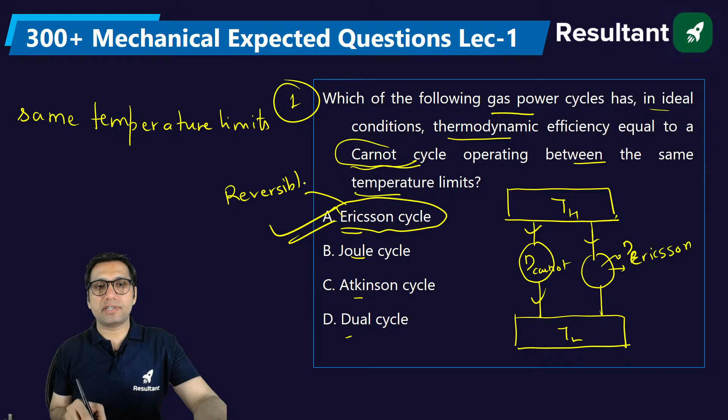Clear? Next: the power developed by the engine at ground level, where air density is 1 kg per meter cube, is 10 kilowatt. So basically, we have an engine which at ground level, when operating, produces a power of 10 kilowatt. At the ground level, when that engine is operating, the density of the air at that point is 1 kg per meter cube. Now the question asks, what will be the power developed in kilowatt at an altitude of 100 meter?

100 meter means if the same engine, that automobile, is moving at some altitude, at an altitude of 100 meter, what will be the power developed? At the ground level, the power is equal to 10 kilowatt and density is equal to 1 kg per meter cube. Obviously, when the automobile operates 100 meter above the ground, at that point density will reduce. How much?

Just half, 0.5 kg per meter cube. One thing you should know: density is directly proportional to pressure. For air, density is directly proportional to pressure, and density is equal to mass per unit volume.

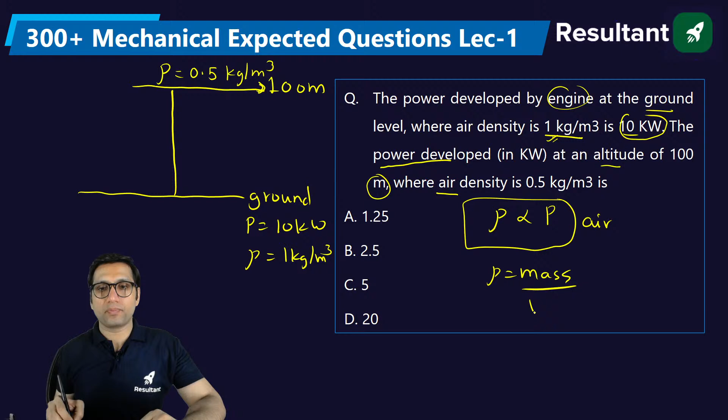In case of the engine, the volume of the engine is kept same. The same engine, when operating 100 meter above the ground, density has reduced because pressure has reduced. Pressure will reduce if you go in the upward direction. So if pressure reduces, density reduces, and it is just half. You can see density was 1, here it is 0.5. Density will reduce, mass of the charge will reduce, power will reduce. So power and density have a direct relation. If the density is reduced to half, the power will reduce to half. Very simple concept. Clear? Understood everyone?

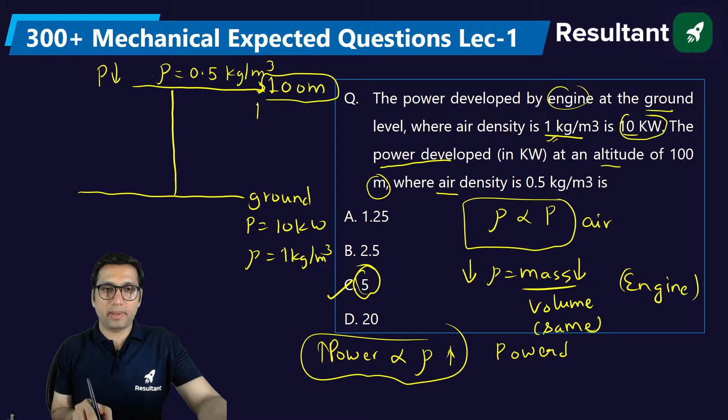So understood, the answer will be 5, because power and density are directly related. More is the density, more will be the power. Density is half, so power will be half. So here the power will be how much? 5 kilowatt. Clear? Next question.

Consider the following statement regarding dry sump lubrication system: the oil from the sump is pumped to the engine cylinder through oil cooler. Dry sump lubrication system is a type of lubrication system used for the IC engine. In this question, they say that in the dry sump lubrication system, the oil from the sump - sump is a reservoir made in the crankcase - is pumped to the engine cylinder through the oil cooler.

With the help of oil cooler, they are saying the oil will be pumped. Why would it be pumped through oil cooler? No, it is wrong.

Oil pressure varies from 30 to 60 bar - no, this is also wrong, this is too much pressure, it's not that much. This is also wrong, it is used for high capacity engine. This is correct - only option 3 is correct, that dry sump lubrication system is used for high capacity engine.

The oil is not pumped to the cylinder with the help of an oil cooler, it is pumped by an oil pump, obviously. Why would an oil cooler be used for pumping oil? So statement 1 is incorrect. The pressure is also not 30 to 60 - that's too much. The pressure will be around 10 to 15 bar, around 10 bar, not 30 to 60. That's too much pressure, so that is also incorrect.

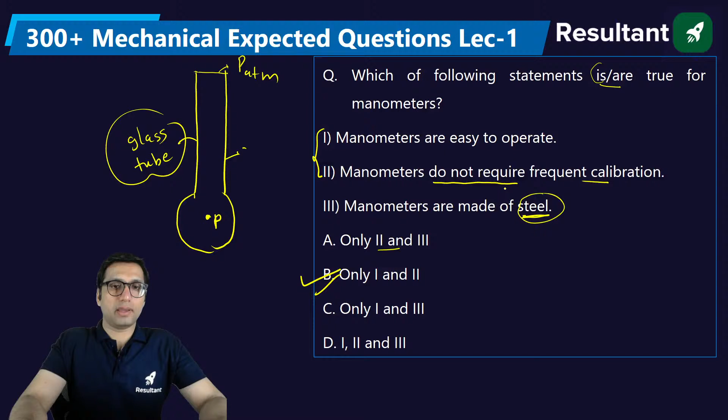Absolutely incorrect. The expression F equals mu A du by dy denotes this is an equation of which of the following Newton's laws? All are Newton's law - Newton's law of force, Newton's law of momentum, Newton's law of motion, Newton's law of viscosity.

Do you know what Newton's law of viscosity is? It says that shear stress is equal to mu du by dy - this is called Newton's law of viscosity. Shear stress, which is shear force per unit area, equals mu du by dy. So from here you can calculate the shear force, which is equal to mu into A du by dy. That is obviously called Newton's law of viscosity. The answer will be option D.

Next question: which of the following is a property of the fluid which makes it suitable to be used in the manometer? We know that the fluid used in the manometer is called manometric fluid, but this fluid should be having a particular property - it's not that any kind of fluid can be used in the manometer. So there should be some property or characteristic that manometric fluid should have.

High surface density, high viscosity, high coefficient of thermal expansion, low viscosity. You have to tell the answer with respect to the manometer. What is the purpose of manometric fluid? Because of the pressure difference, the liquid will rise in the manometer, right? So high surface density - no. High viscosity - if the viscosity is high, that fluid cannot easily flow, so having high viscosity is obviously not correct.

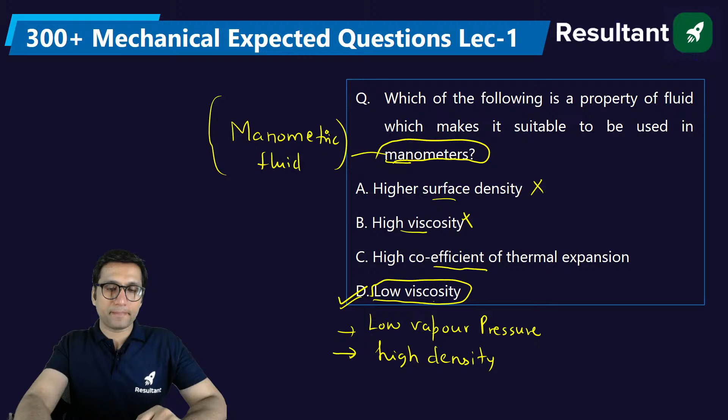In a boundary layer at a certain location, the boundary layer thickness is 0.5 centimeter, displacement thickness is 0.15, and momentum thickness is 0.0585. What is the shape factor at this location?

Now, what is the formula for shape factor? What is meant by shape factor? In context of the boundary layer, the shape factor is equal to the ratio of - can you tell me what is shape factor?

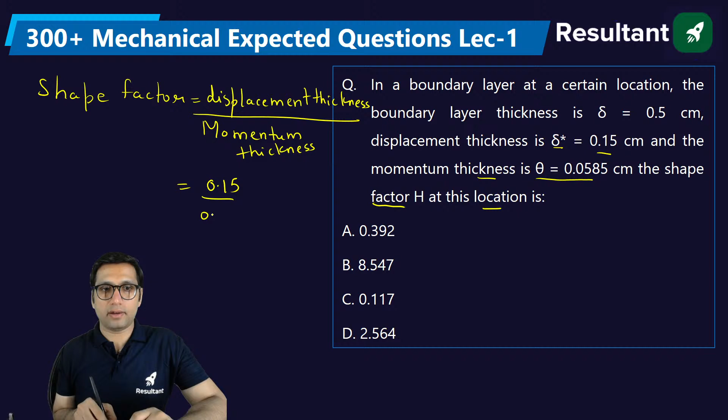Any idea? It is ratio of displacement thickness to the momentum thickness. This is known as shape factor. If you just put the values, you will get the answer. The displacement thickness is 0.15, and this is 0.0585. Put the values and tell me what value you are getting. If you don't know the formula, you will get the wrong answer. 2.564 will be the answer for this question.

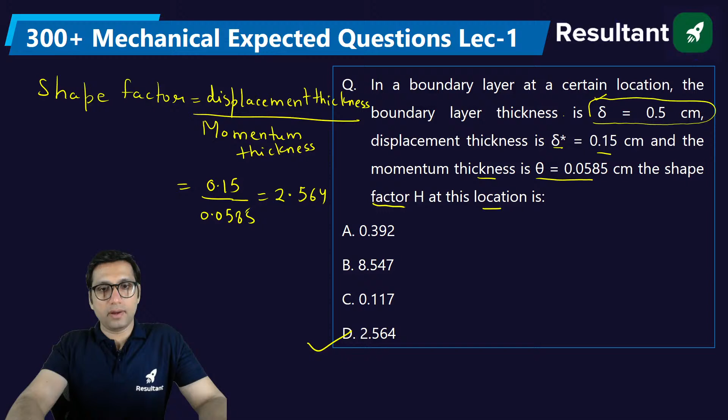So that is the case about the numerical questions. If somehow you don't know the formula, even if the calculation is very simple, you will definitely get the wrong answer. For example, many of you, if you do momentum by displacement thickness, your answer will be wrong. If you do boundary layer thickness by displacement thickness, your answer will be wrong. So you should know the correct formula. Here boundary layer thickness is just given to confuse you. If you are using this value, you will just get confused. It is just given as an extra value to confuse you. It has no role in calculating the shape factor.

Consider the following system: an electrical heater, a gas turbine, a reciprocating compressor. The steady flow energy equation can be applied to which of the above systems? These are all different types of systems, right? The steady flow energy equation is: m into h1 plus v1 square by 2000 plus g into z1 by 1000 plus q equals m h2 plus v2 square by 2000 plus g into z2 by 1000 plus w. This equation, my friend, is the steady flow energy equation. It is only applicable for an open system, not for a closed system, under steady state condition. A gas turbine is an open system.

An electrical heater is a closed system. Obviously current is passed through the heater, but is there any mass transfer in the heater? No. A reciprocating compressor is an open system. So 2 and 3 are cases of open systems. The answer will be option D. It is only applicable for an open system. If there is an electrical heater, no mass transfer takes place in it. Is there any mass transfer? No. If there is no mass transfer, it is a closed system. And if it is a closed system, you cannot apply the steady flow energy equation to it. It is only for an open system, right?

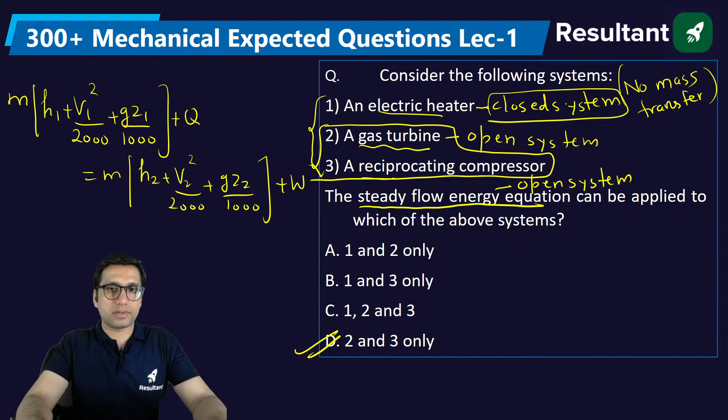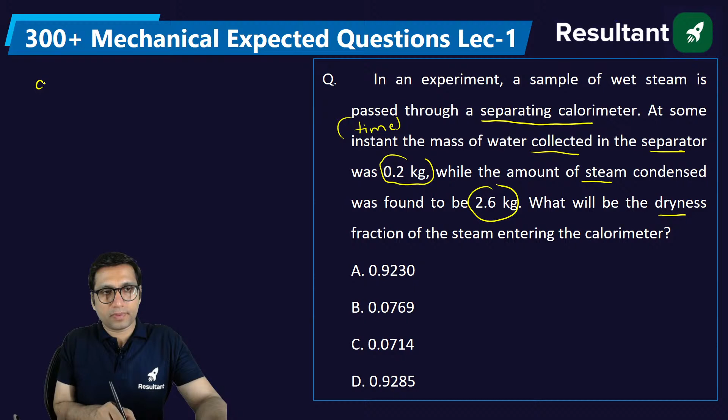In an experiment, a sample of wet steam is passed through a separating calorimeter. At some instant of time, the mass of water collected in the separator was 0.2 kg, while the amount of steam which was condensed was 2.6 kg. What will be the dryness fraction of steam? So what is dryness fraction? The dryness fraction is the mass of the steam which is about to condense, divided by that mass plus the mass of the water which is separated after condensing. So just put all the values: 2.6 by 2.6 plus 0.2, and you will get the correct answer. What answer are you getting? Tell me, everyone.

Formula is important. If you solve it, you will get 0.928. Option D, clear?

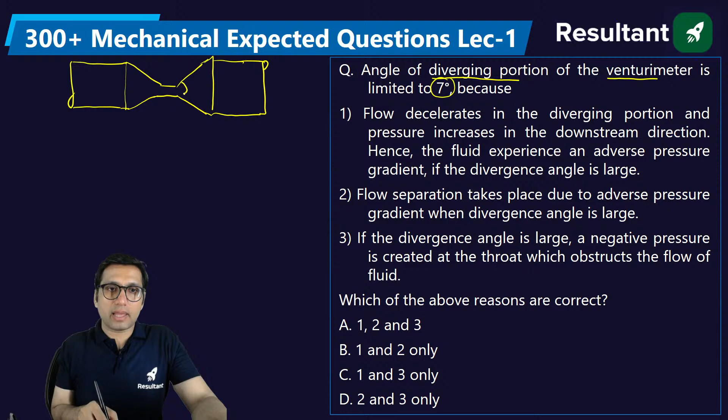Angle of diverging portion of the venturimeter is limited to 7 degrees. You know that in the venturimeter we have 2 sections: one is called the convergent section, like in the case of a convergent-divergent nozzle, followed by a divergent section. So that is how a venturimeter is - it consists of a convergence section followed by a divergent section. But the angle of divergence should be up to 7 degrees, not more than 7 degrees.

Why? Because the flow decelerates in the diverging section. Decelerate means the velocity reduces. Velocity reduces in the diverging portion and pressure increases. Hence, the fluid experiences an adverse pressure gradient if the divergence angle is more.

Yes, that is absolutely correct. And this adverse pressure gradient causes boundary layer separation. So this reason is correct. Boundary layer separation will take place if the angle is more than 7 degrees. Flow separation takes place due to adverse pressure gradient when divergence angle is large. This is also correct. If the divergence angle is large, or negative pressure - no, option 3 is not correct.

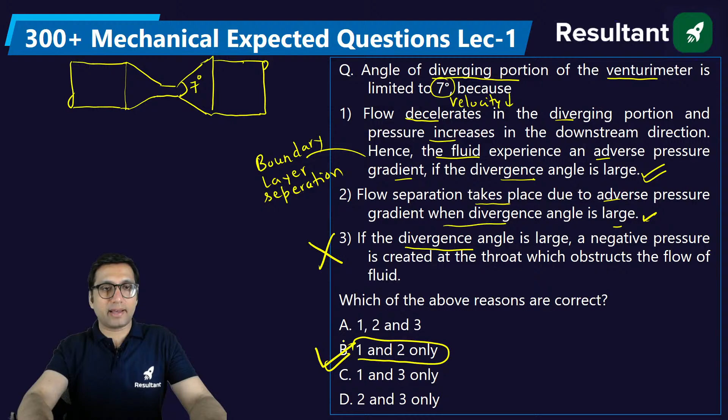The right answer is option B: 1 and 2 are correct. That is the reason why the angle of divergence should not be more than 7 degrees. It should be up to 7 degrees.

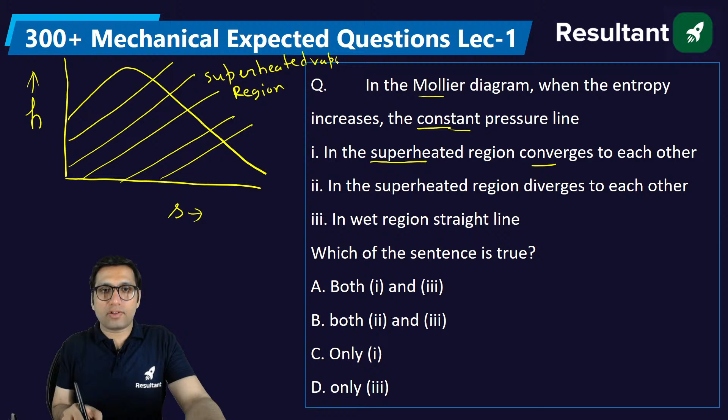Do you see they are getting converged or they are getting diverged? Superheated region, this is superheated vapor region. Are they getting converged or diverged? Tell me - in the superheated region they are diverging, yes, they get diverged.

This is correct. In the wet region, they are a straight line - straight inclined line, not completely straight. You can call it a straight inclined line. Straight line you cannot say, because straight line can be vertical also, horizontal also. It is actually a straight inclined line.

So option both 2 and 3 are correct - 2 and 3, that is option B, will be the right answer for this question. So this is the wet region. In the wet region, the constant pressure lines are straight inclined lines. But in the superheated region, they are diverging to each other. Diverging means positive slope.

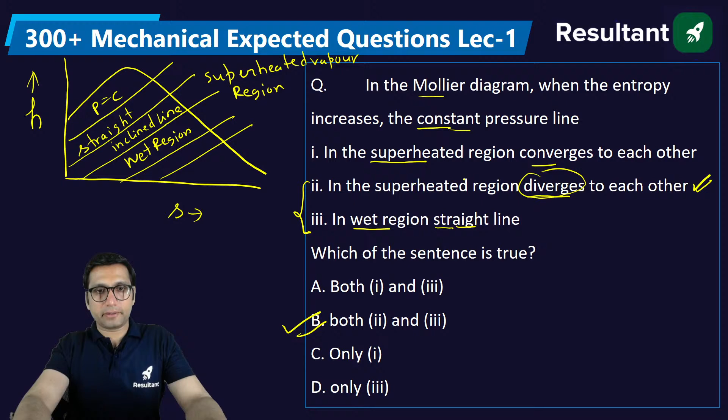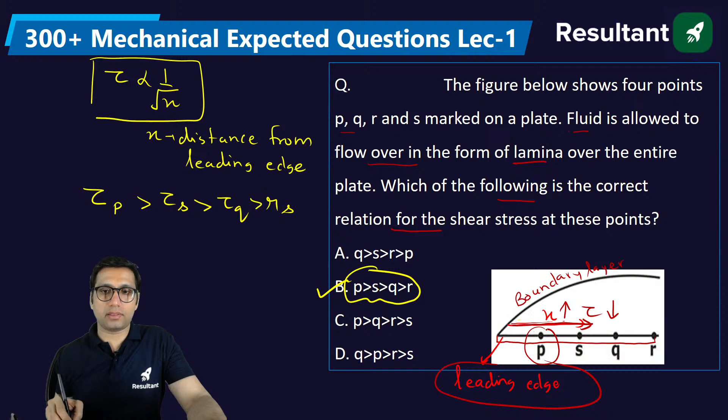As you move in the x direction, this is the leading edge. If you move in this direction, the distance increases, so shear stress will reduce. Maximum shear stress will be at this point, and as you move further in this direction, shear stress will decrease.

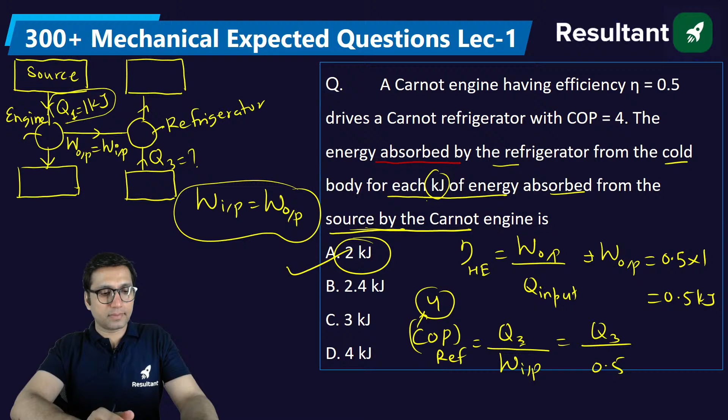Next question: the enthalpy of the wet steam after throttling from 1 to 2. You have to tell the enthalpy of the wet steam after throttling from 1 to 2. The process and properties are given: enthalpy at point A is given, at point B the enthalpy is given, and X1, the dryness fraction at point 1, is given.

So notice here, as you know, point 1 is in the wet region. And for steam in the wet region, how do you find the enthalpy? The formula is HF plus X times of Hg minus HF. Remember this formula? Now HF is nothing but HA here.

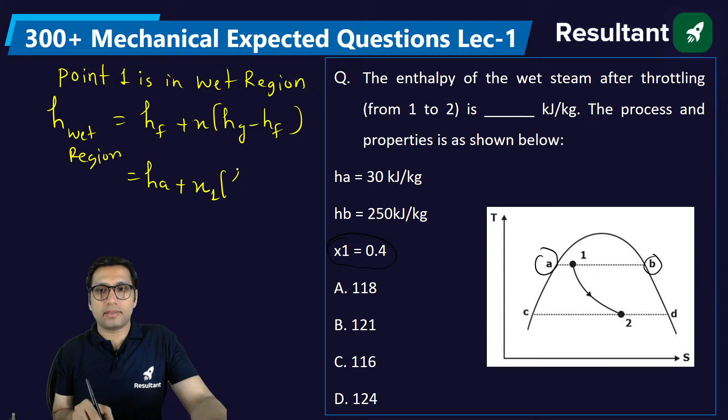HF is HA, X is already given as X1, and Hg is Hb minus HA. Just put all the values, you will get the answer for enthalpy of the wet steam after throttling. But in this question they are asking H2, after throttling they are asking H2. But you know that for throttling, H1 is equal to H2.

For throttling, enthalpy is constant. So if you find the value of H1, you can get the value of H2 - that will be the same. So it will be 30 plus 0.4 into 250 minus 30. Solve it, you will get the answer. Tell me what value you are getting. Understood the concept or not?

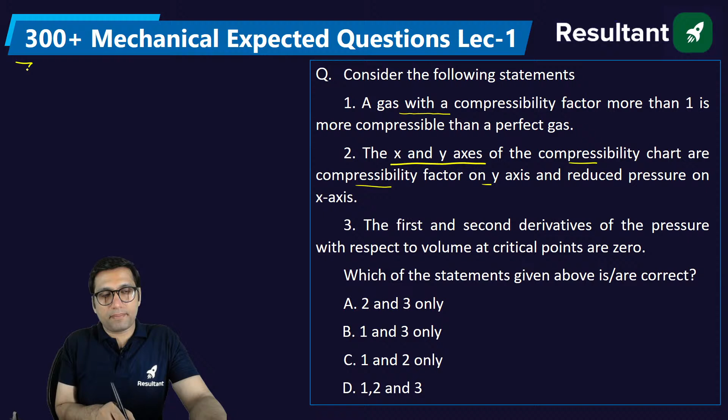First, let's read statement number 1. A gas with compressibility factor - what is compressibility factor? Compressibility factor is PV by nRT. This is called compressibility factor, right? Here Z is called as compressibility factor.

Now it is saying that a gas having compressibility factor more than 1 is more compressible than a perfect gas. Compressibility factor has one more formula: it is volume of the real gas to the volume of the ideal gas or perfect gas.

If Z is more than 1, what will happen? The volume of the real gas will be more than the volume of the perfect gas. And you know very well what is the meaning of compression. If a gas is more compressible, it will have less volume, not more volume. Here it is saying that a gas whose compressibility factor is more than 1 will be more compressible. No, it will be less compressible than a perfect gas.

Are you getting my point? Because compression reduces the volume and increases the pressure. According to this, the volume is getting increased if the gas is more compressible. So this is wrong, statement 1 is wrong. So this and this will be wrong. The answer will be option A.

See, statement based questions are very easy to solve, right? Because statement 1 is not correct, option 1 is not correct. So those options which have option 1 in them will be not correct.

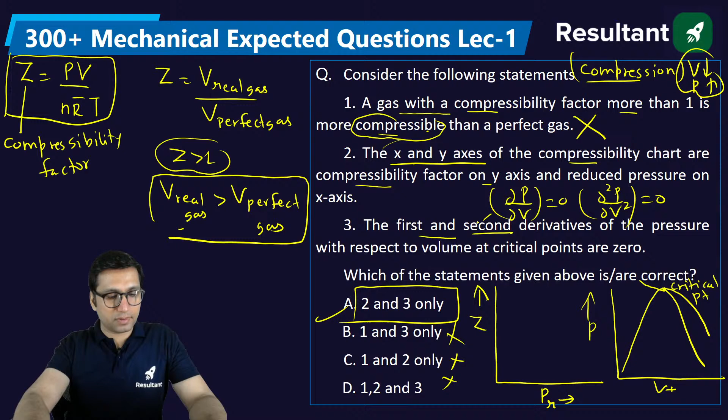A Pelton wheel turbine operates with a speed of 600 rpm while the speed ratio is 0.44 and net head of 300 meter. What is the diameter of the wheel?

This particular question states the speed ratio in the question. What is speed ratio? Speed ratio is basically U, the blade speed of the turbine, divided by under root 2GH. Now this speed ratio is given to you as 0.44.

This blade speed you can find from here: under root of square root of 2 into 9.81 into H is 300. Just solve it and you will get the value of U from here. Now what is U? U is the blade speed, called tangential blade speed, which is equal to pi D N by 60. This is called tangential blade speed.

So firstly find the value of U, then put it here, and you will get the value of D. D is being asked in this question - diameter of the wheel. Please everyone try to solve it and tell me the answer.

Just a second. See, I am using the calculator, full use of calculator, because we know that you should get the right answer. So this will come out to be 33.75 meter per second.

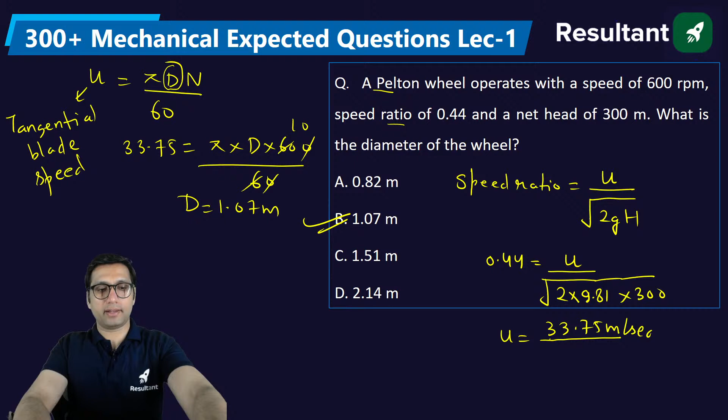Next question. In a closed system, volume changes from 1 meter cube to 2 meter cube, and heat addition is 2000 kilojoule. Find the change in internal energy, given the pressure volume relation is this. The pressure and volume are related like this. You have to find the change in internal energy.

The heat addition is given, so it will be positive 2000, because in a closed system heat is supplied, it will be taken as positive.

Now pressure is equal to 1000 times of volume. Whenever you find this kind of relation between pressure and volume, you have to find the work by using the relation integral of 1 to 2 PdV. This is how you are going to find the work. So pressure is 1000 into volume, so 1000 V dV.

Integrated, now integration is 1 meter cube to 2 meter cube, so the volume is changing from 1 meter cube to 2 meter cube. Just solve it, so this will be 1000 V square by 2 after integration, 1 to 2 meter cube. Just solve it, you will get the answer. What is the value you are getting for work? Tell me.

It will be 500. 4 minus 1, 500 into 3, okay, 1500. So you will get 1500 kilojoule as this.

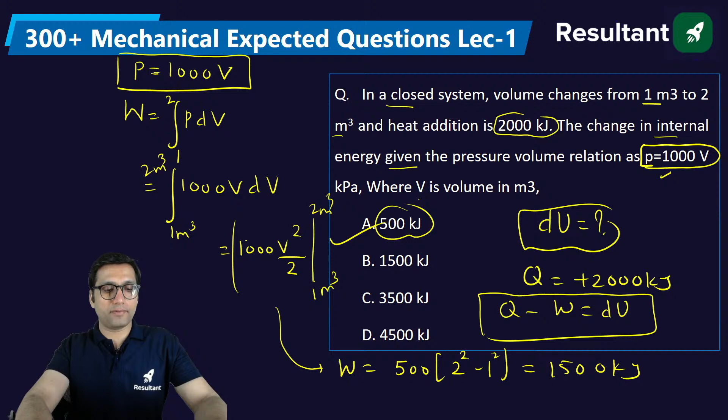Yes everyone, I guess for some of the students the question level, they are finding the level of question tough, but let me tell you, when you are in a process of practicing, you should practice all the type of questions that have a possibility of coming in the exam. Just practicing easy questions which you have solved many times doesn't make you, it's not called a good practice, right?

If the specific enthalpy of a refrigerant at the entry and exit of the evaporator are given, and cooling required is 15 tons of refrigeration, then mass flow rate of the refrigerant is what?

So cooling required is how much? What is the cooling required? Cooling required is equal to, see, I can also bring easy questions for you, I have no problem, okay. You can easily play ABCD there, okay, you can easily solve those questions, but thing is that then learning will not happen. The correct learning will not take place.

15 tons. Now 15 tons can be also written as 15 into 3.5 kilowatt. Now cooling required is 15 into 3.5 is equal to mass flow rate into enthalpy at the entry and exit of evaporator. This is the formula. 15 into 3.5 is equal to mass flow rate.

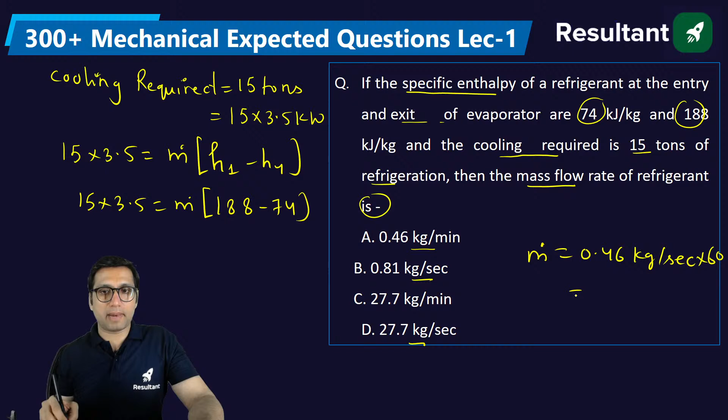Okay, so you get mass flow rate is equal to 0.46 kg per second. Now 0.46 kg per second, you are not getting any option. So what you will do, because you are not getting mass flow rate in kg per second, so what you do, you multiply with 60. Multiply with 60, you will get 27.7 kg per minute. In kg per minute, you will get 27.7.

Clear? Is it clear to everyone? So firstly, we try to solve it in kg per second, because we have taken 1 ton as 3.5 kilowatt, which is 3.5 kilojoule per second. So the mass flow rate after calculating was 0.46 kg per second, but the option was not there, so we multiply by 60. Okay.

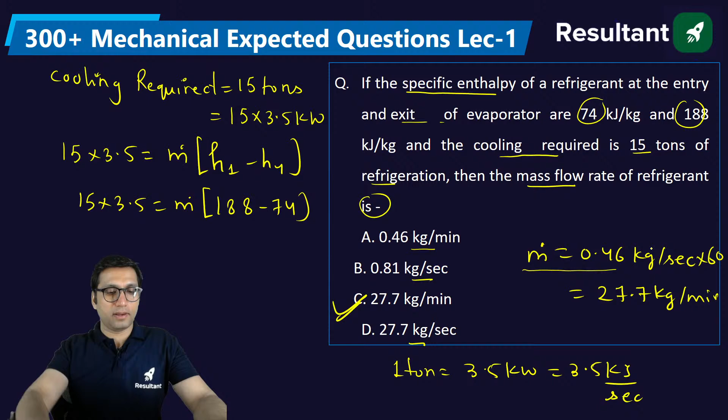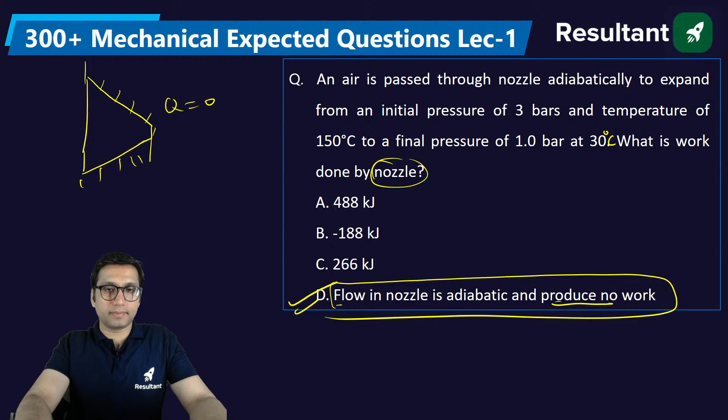This is a numerical question, and I know that after seeing it, many of you will try to run away. But let me tell you, I know I can't hold you in this session because it's free, but if you continue and follow these questions, your learning will definitely improve. You will get good concepts and good questions in these sessions.

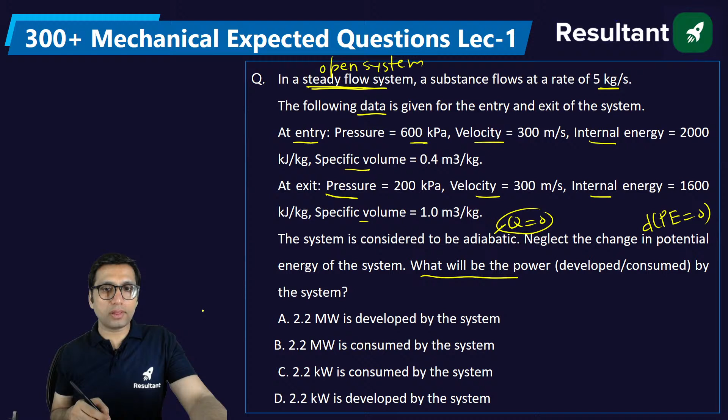In order to solve this question, I will be using the steady flow energy equation formula. Just a second, let me get a complete blank slide so I can solve this question properly.

The question is quite big. The steady flow energy equation is: mass flow rate into H1 plus V1 squared by 2000, plus G into Z1. Try to understand the question first, what is being asked and what you have to do.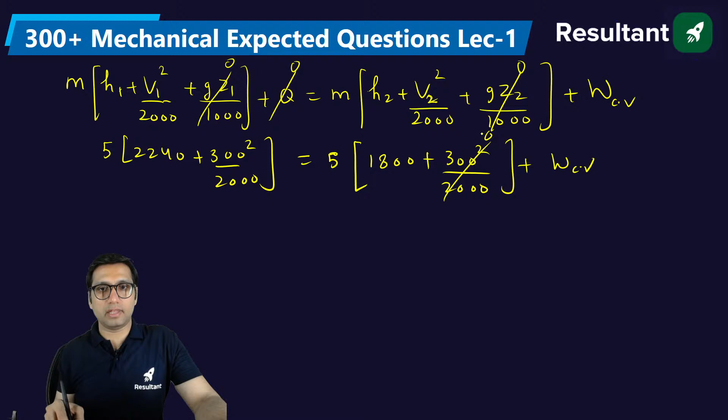Velocity at exit and inlet is the same, so what happens? You know it very well. This term gets cancelled out because velocity is the same. So the power output will be equal to 5 into 2240 minus 1800. Very simple question.

So just by finding the enthalpy, you get the answer: 2200 kilowatt, or 2.2 megawatt of power. So 2.2 megawatt of power is developed by the system. Why by the system? Because the work is coming out to be positive, so it is work done by the system.

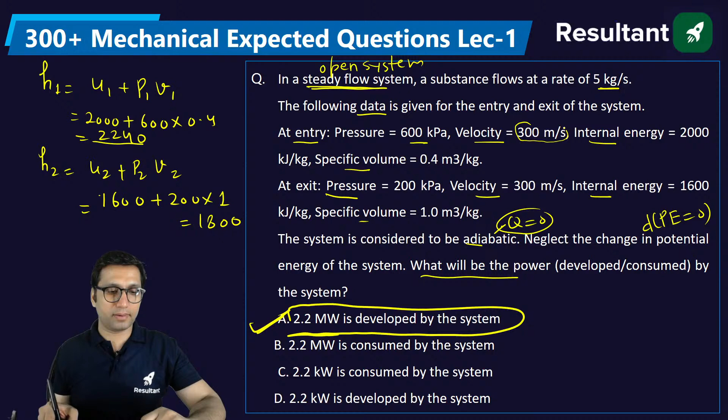Clear? Understood everyone how we solved this question? This could have been noticed early on, that kinetic energy can be neglected because velocity is the same at inlet and exit, so this term could have been dropped from the start.

So calculation would have been: 5 into 2240 equals 5 into 1800 plus power output. So you can get the power output like this.

Clear? Next question: generator and absorber are components of a refrigeration system. Now you like these kinds of questions, where you can say, okay, generator and absorber are components of a vapor absorption system. Yes.

You will feel this is such an easy question. Generator, absorber, pump - they are components of a vapor absorption system.

Clear? The diagram factor is the ratio. What is diagram factor? Diagram factor is the ratio of area of the actual indicator diagram to the area of theoretical indicator diagram. Actual work done per stroke to the theoretical work done per stroke. Actual mean effective pressure to theoretical mean effective pressure. Any of the above mentioned. Well, all of the above statements are correct. See, if you say actual indicator diagram to theoretical indicator diagram, then also it is correct. Since actual area of the indicator diagram is equal to area of...

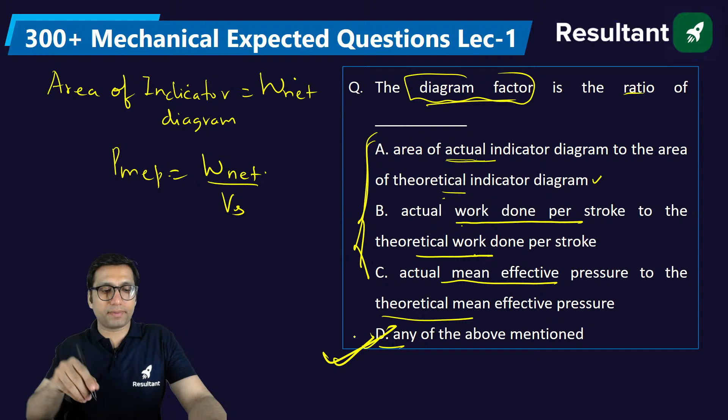So any of the above can be the answer. Neglecting the pump work, the energy equation for vapor absorption system may be written as - neglecting the pump work. So you know it very well that if you see a vapor absorption refrigeration system, we have different components like generator.

Since vapor absorption refrigeration system works in a cycle, and for a cycle net heat transfer is equal to net work transfer, right? Now what is the net heat transfer? Net heat transfer is equal to heat rejected minus heat supplied. Net work transfer is equal to work of pump. Now if you neglect the work of the pump, it will be 0, right? So we can say heat rejected minus heat supplied equal to 0.

Where is heat rejected in the vapor absorption system? Heat is rejected where? Tell me. Heat is rejected in the absorber. Heat is rejected in the condenser. In these two components heat is rejected. And where is the heat supplied? It is supplied in the evaporator and it is supplied in the generator.

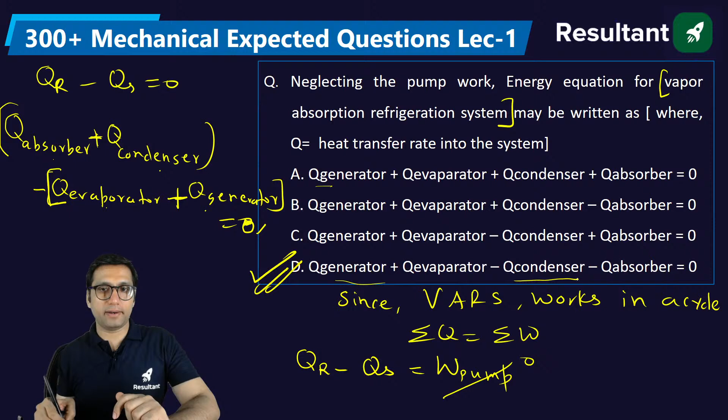Consider the following statements: to increase the stability of the empty ship, ballast are loaded at the bottom. What is ballast? Ballast is basically some kind of load. You may have also heard about missiles, but we are not talking about missiles here - we are talking about some load kept at the bottom to increase the stability.

And if you are talking about the stability of the ship, the stability of a ship is determined by metacentric height, right? Because a ship is a partially submerged body, metacentric height will be deciding the stability of a ship. First of all, see this - the first statement is that to increase the stability, we are providing the ballast at the bottom of the ship, putting some load at the bottom of the ship.

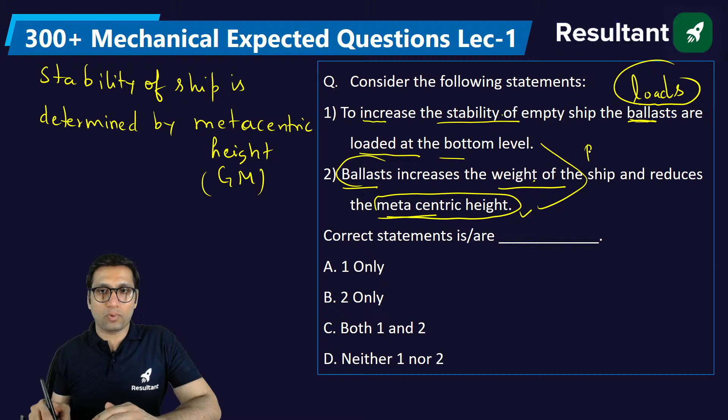Second is the reason: ballast will increase the weight of the ship and reduce the metacentric height. If they are saying that the ballast will increase the weight and that will reduce the metacentric height - so if the metacentric height reduces, will the stability increase? Both statements are contradictory. They are contradictory, because if the metacentric height will reduce, then what will happen?

What will happen to the stability? Tell me, will it reduce? So either option 2 is incorrect or 1 is incorrect. Out of these two, one of them is incorrect, right? That is 100% sure. Which is incorrect? They are asking for the correct statement. So both 1 and 2 cannot be correct because they are contradictory. You cannot say both are incorrect, one of them is incorrect for sure. Both are not correct, that is also correct. We cannot say both are incorrect, sorry, both are not correct. Tell me what can be the answer.

To increase the stability of the empty ship, ballasts are loaded. Think about it, use the brain. Does putting some load on the ship increase the stability, or is it something else related to the stability? Is there any relation of stability with the load? Stability is related to the load. Is there any kind of relation with this?

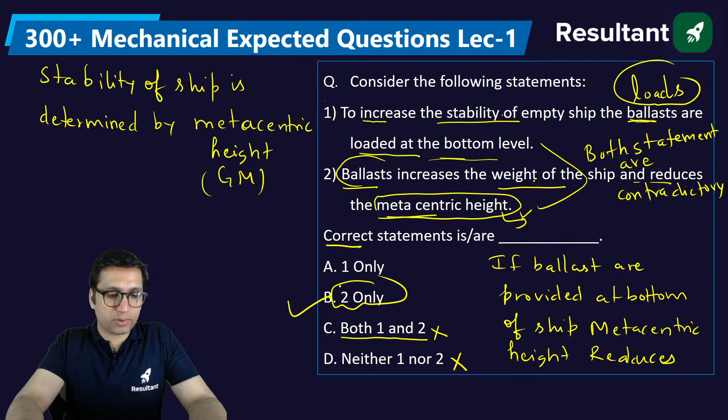Next is, consider the following statement. So Kuldeep will be happy that yes, he has got the right answer. Last question for today's session.

Consider the following statements. Absolute 0 Kelvin can be achieved by using Carnot cycle - that is 0 Kelvin temperature, is it possible by using Carnot cycle? PMM1 is a machine operating in a cycle having 100% efficiency. No work producing system can have efficiency more than that of Carnot. Which of these statements are incorrect?

They are not asking about the correct statement, they are asking about the incorrect statement. Absolute 0 Kelvin can be achieved by Carnot - this is not correct. PMM1, what is PMM1? PMM1 is a machine which gives you work output without any work input. So for a cycle, efficiency of this will be work output divided by 0. Efficiency will not be 100%, it is infinite. This is also incorrect. This is correct - no work producing system can have efficiency more than Carnot. But they are asking about the incorrect ones, so 1 and 2 are incorrect for this question, because they are asking which statements are incorrect.